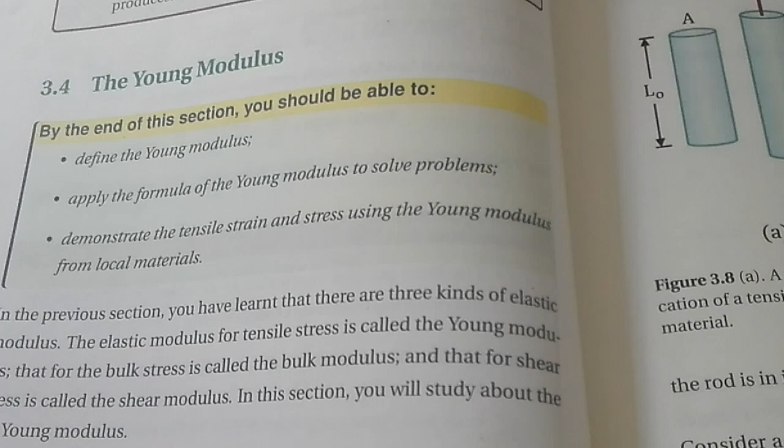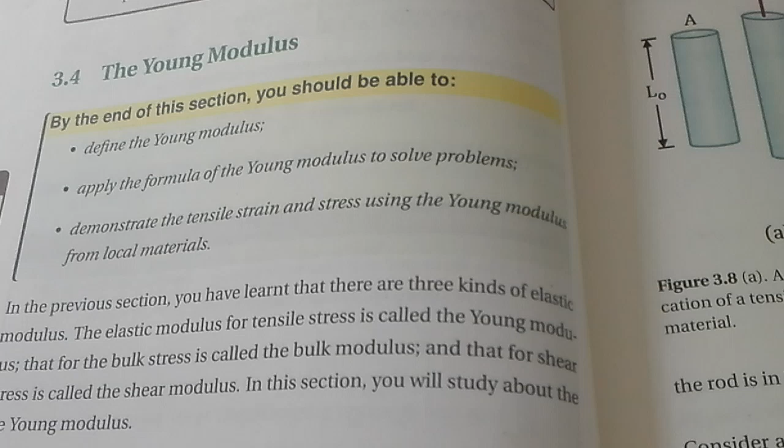the magnitude of the strain produced is the same whether the stress is tensile or compressive. The strain value of the material is the same whether the material is compressive or tensile. The ratio of tensile or compressive stress to the longitudinal strain is known as the Young modulus.

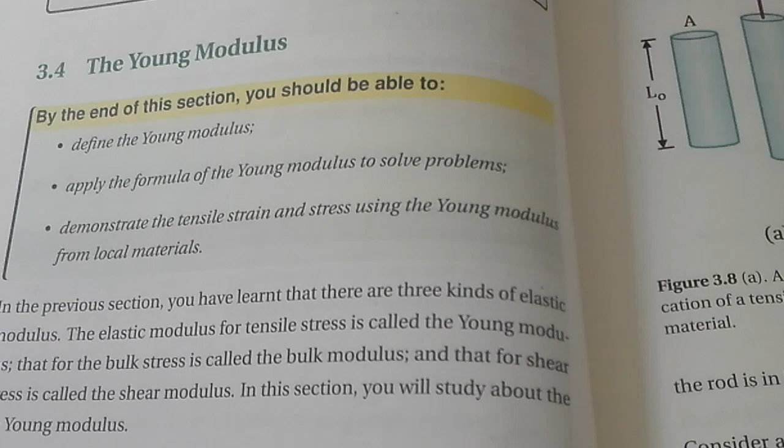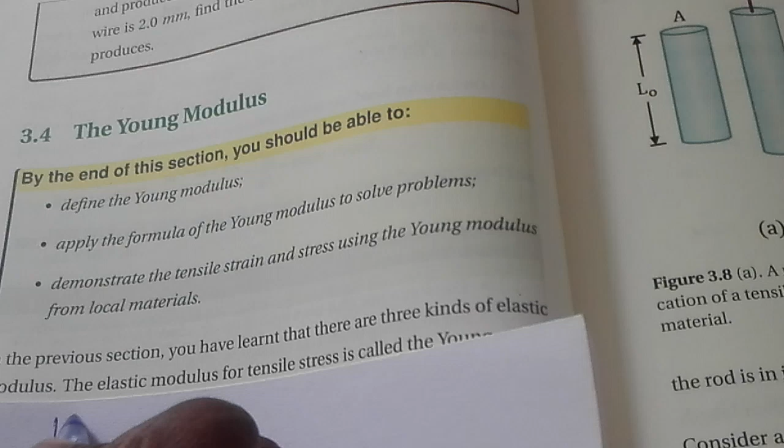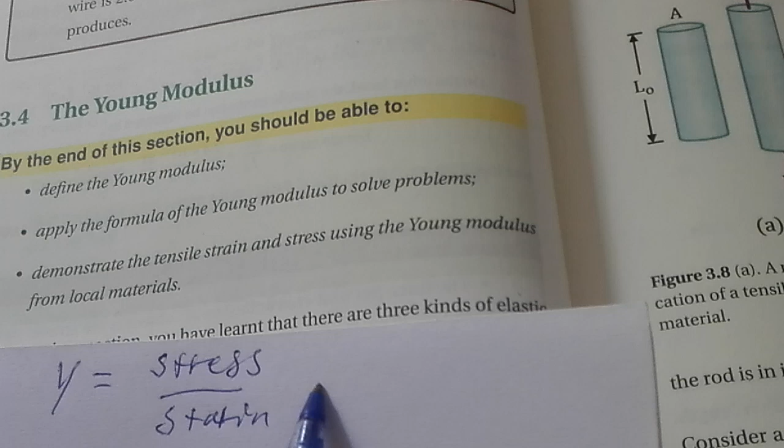Young modulus, for calculation, we represent with capital Y. Young modulus capital Y which is equal to stress over strain is how we work it out. For the same material the strain value cannot be changed, therefore within the stress, whether it is tensile or compressive, the Young modulus for the materials will be calculated like this.

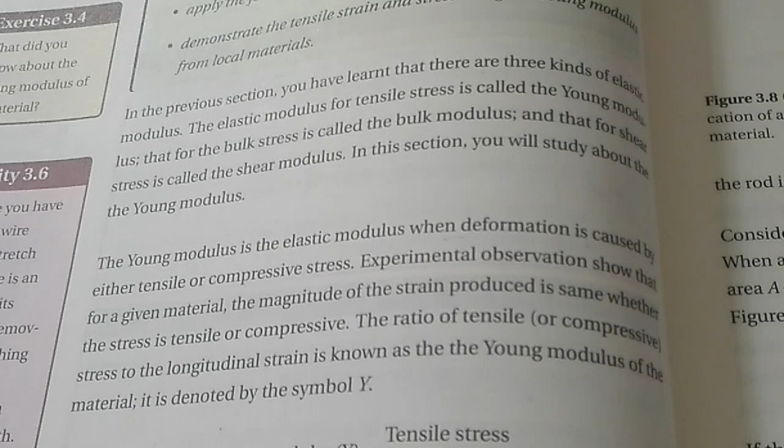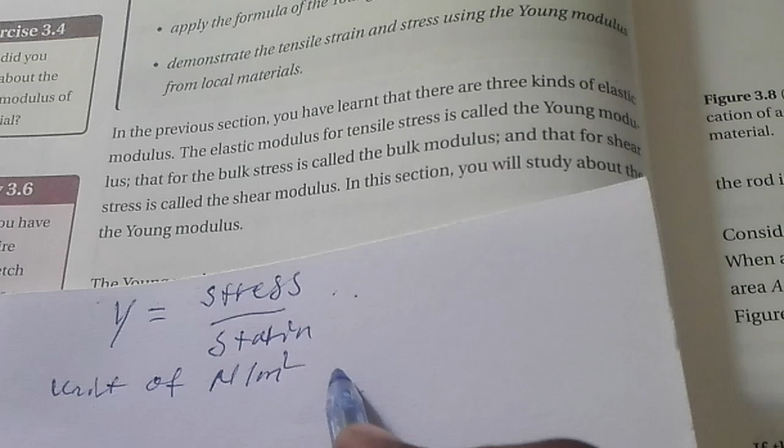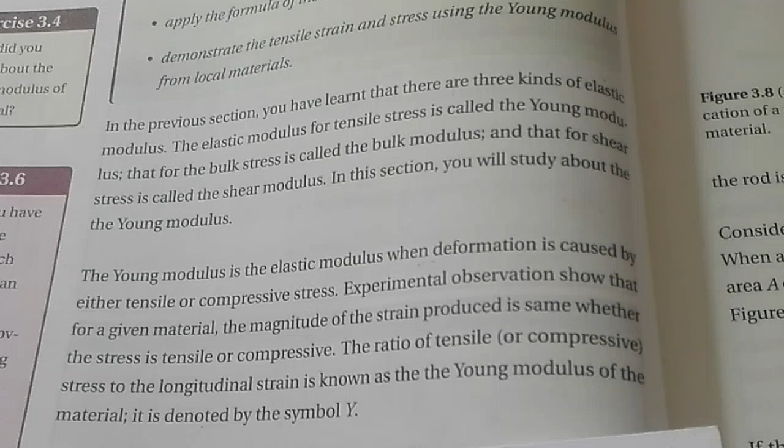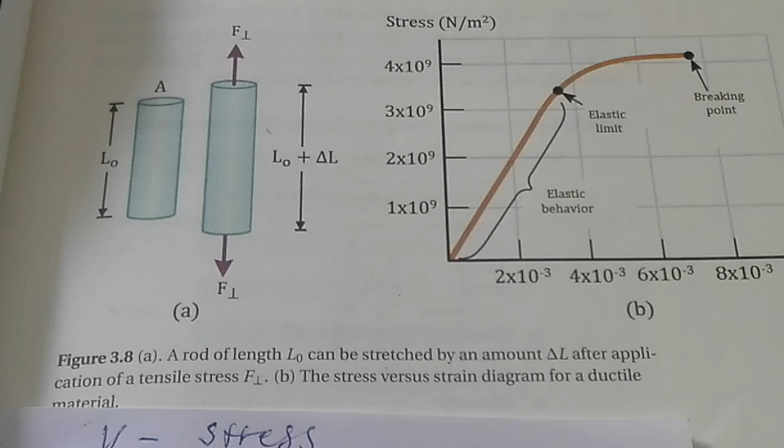or it might be pascal. That is the unit. We relate it like this. The relation between the tensile stress and tensile strain is a linear relation. As we saw before, they are directly related. Tensile stress and tensile strain will have a linear relation.

What you see here is what was shown before. For example, this material initially had a certain length, and this cylindrical material, as an external force is applied to it like a spring force, it will be stretched and have a length increase like this.

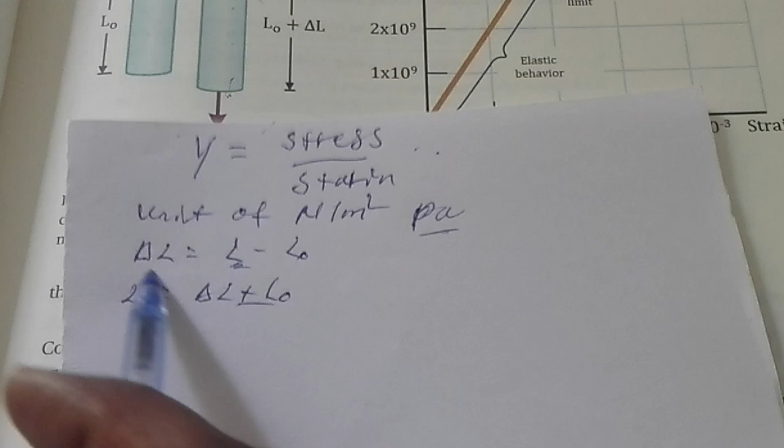Y capital which is equal to stress, meaning force over area, all over strain, meaning tensile strain, change of length over length naught. If we use reciprocal multiplication, what happens? It becomes force times length naught over area times change of length.

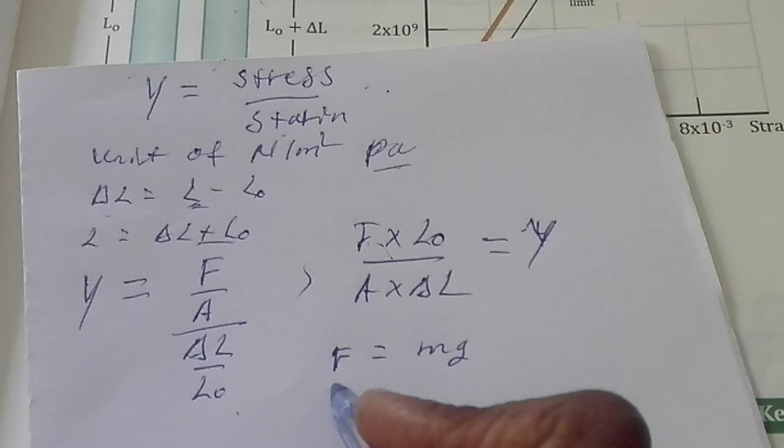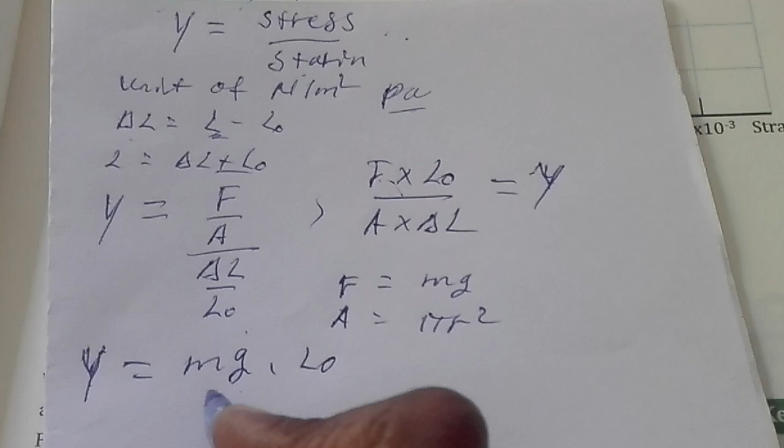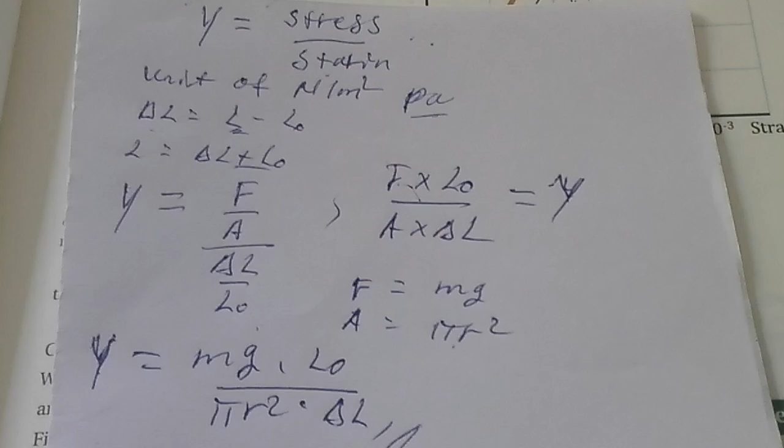Y capital which is equal to force, substitute mass times gravity, times length naught over area pi r square times change of length — this is the formula that we use to equate the Young modulus within tensile or compressive strains.

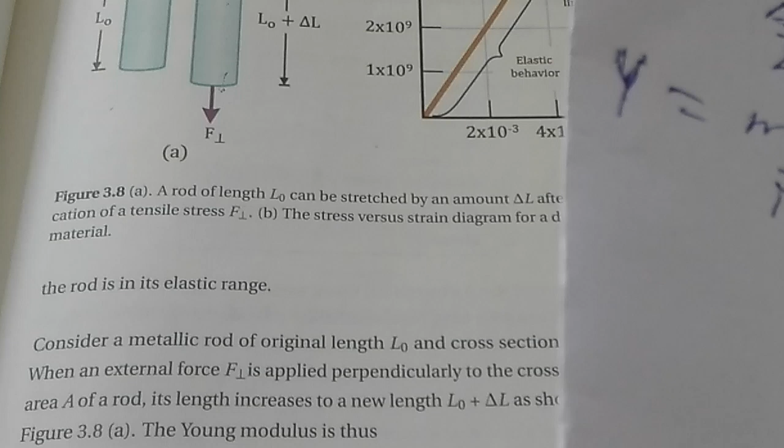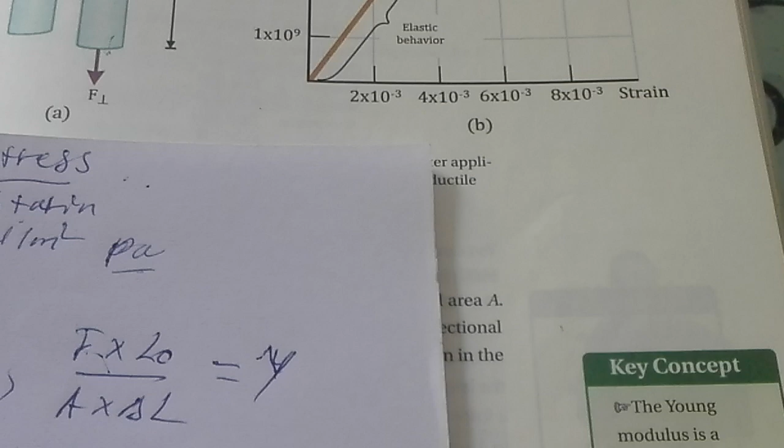We can show Young modulus for compressive stress or tensile stress this way. So what does Young modulus mean? Young modulus is the property — a property of the material that tells us how easily it can stretch and deform, and is defined as the

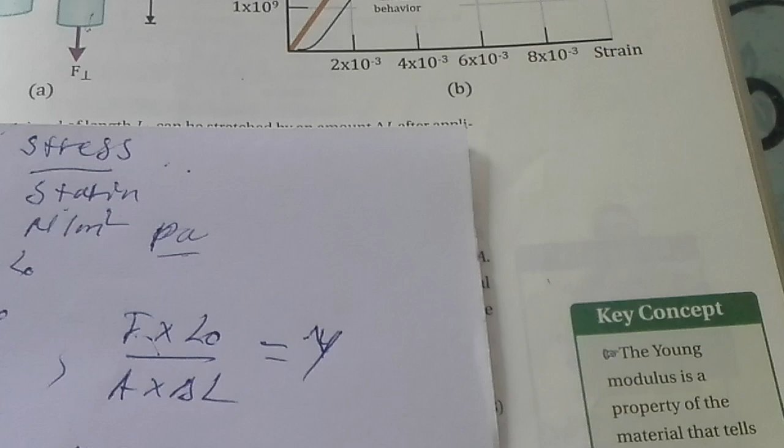ratio of tensile stress to tensile strain. So you have to make clear the definition of Young modulus like this.

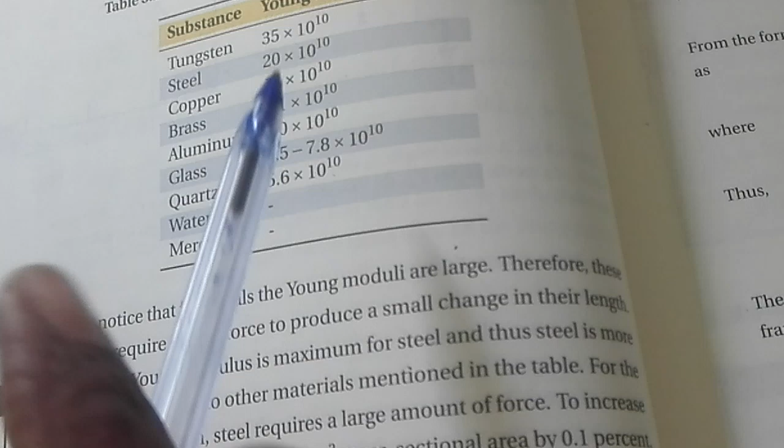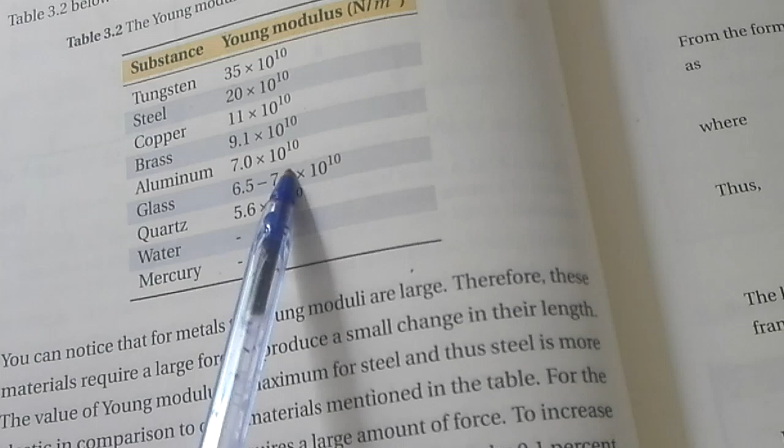እዚህ የምታዩት young modulus of different substance in Newton per meter square ነው የሚለን። ሰንጠረዡ ላይ የተቀመጡልን ሳብስታንሶች አሉ እዚህ ልዩ ቁሶች እዛ ያንግ ሞጁለስ ቫልዩዋቸው አለ። አብዛኛዎቹ ሜታሎች ናቸው።

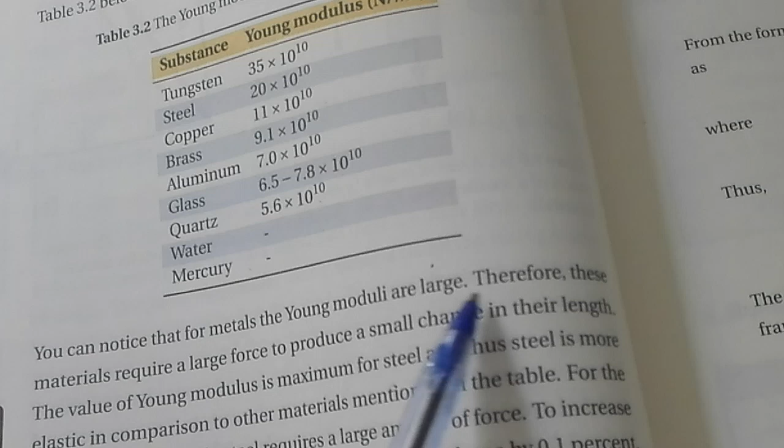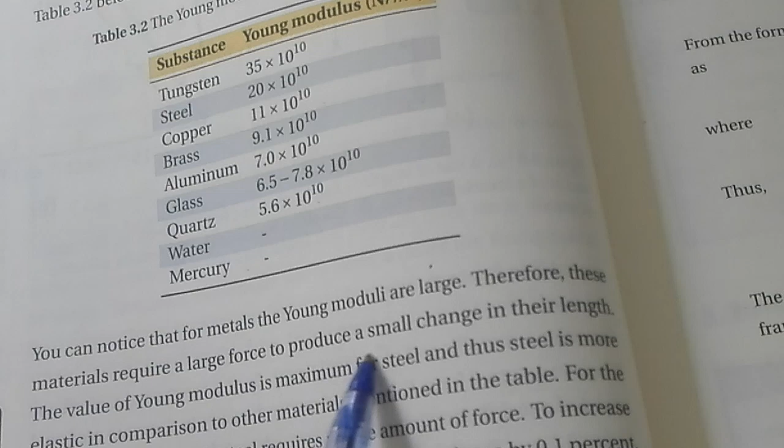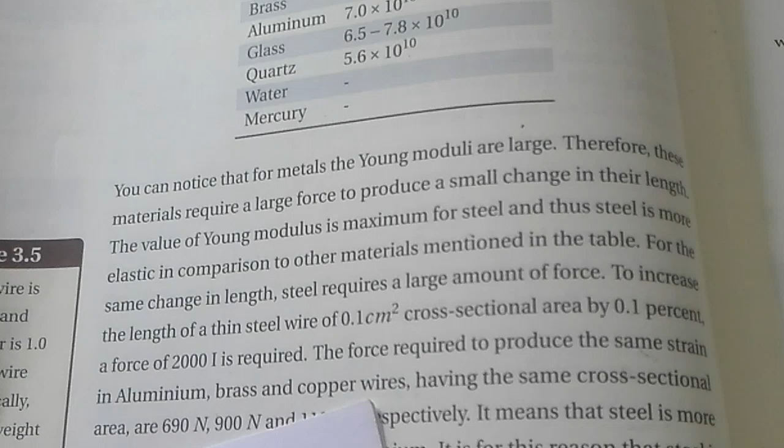ስለዚህ ሜታል ደግሞ ከፍተኛ large values of Young modulus ነው ያላቸው, therefore the material requires large force to produce a small change in their length ማለት ነው። when the Young modulus for the substance will be greater it means it requires a greater external force to deform the material ማለት ነው። ስለዚህ you have to make this clear for the substance appearing within the table.

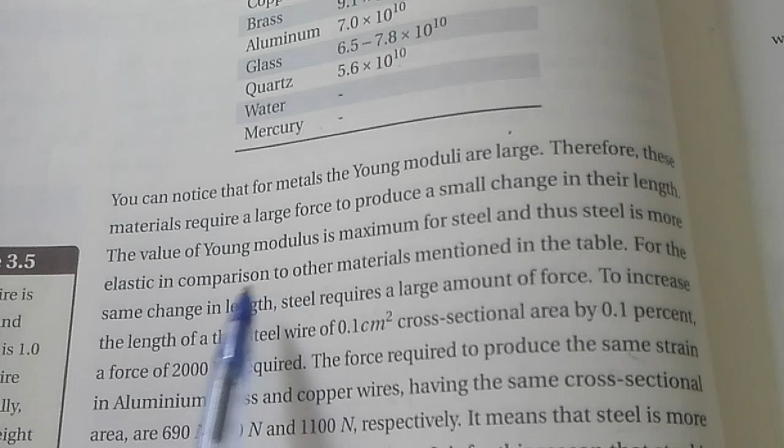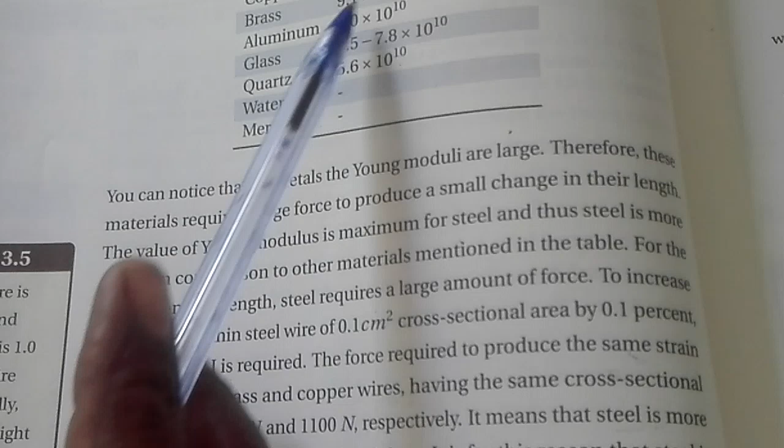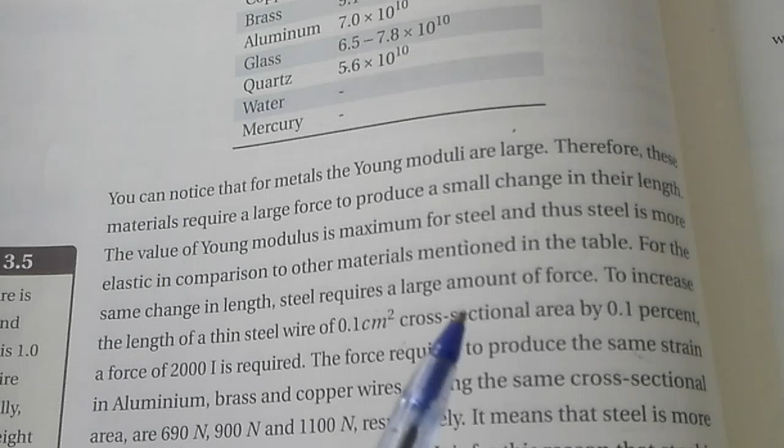ለምሳሌ ከስቲል አንስተን ስቲል ኮፐር ብራስ አሉሚኒየም እያልን ስንሄድ Young modulus ቫልዩዋቸው እየቀነሰ ነው የሚሄደው። ከፍተኛ Young modulus ቫልዩ ያለው ስቲል ነው። ስለዚህ ስቲልን ከሌሎቹ ሜታል ታይፖች ጋር ስናነጻጽረው greater large values of Young modulus value አለው።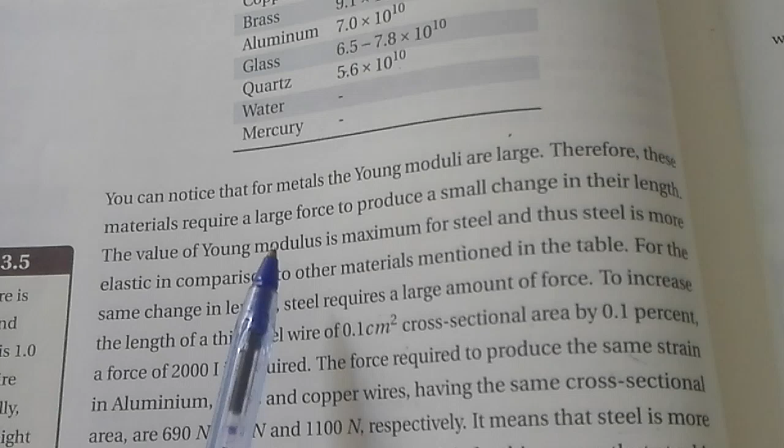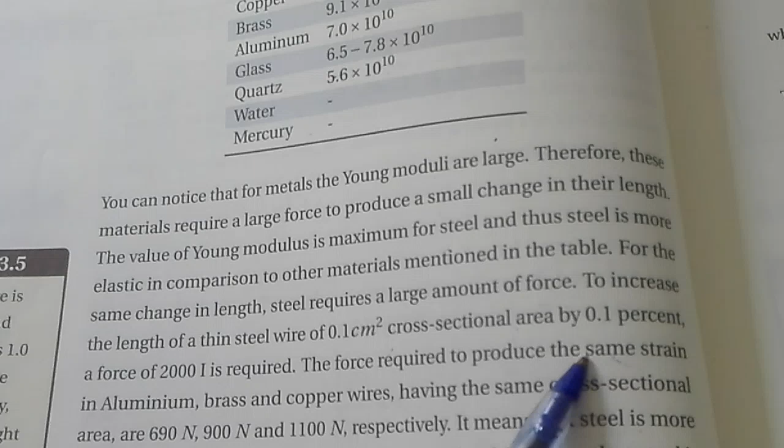ይሄ ማለት ነው it will require large external force to deform the steel ማለት ነው። ስለዚህ steel ተመራጭ ነው የተለያዩ አገልግሎቶች ላይ ለማዋል፣ በቀላሉ ዲፎርም ስለማይሆን፣ ሬዚስቲቪቲው ከፍተኛ ስለሆነ very necessary metal type ነው ማለት ነው።

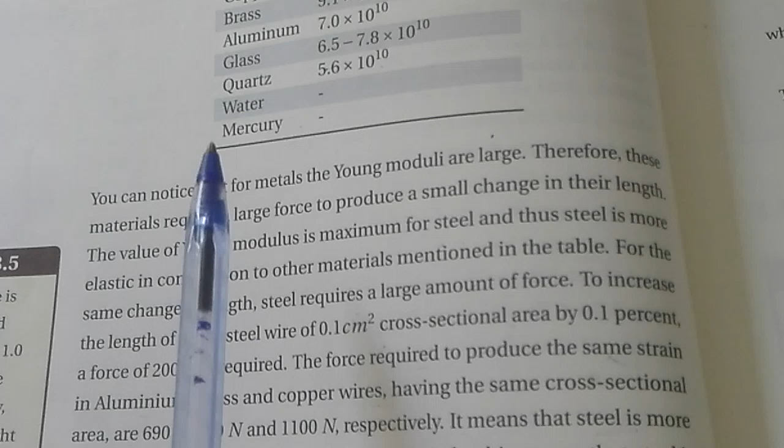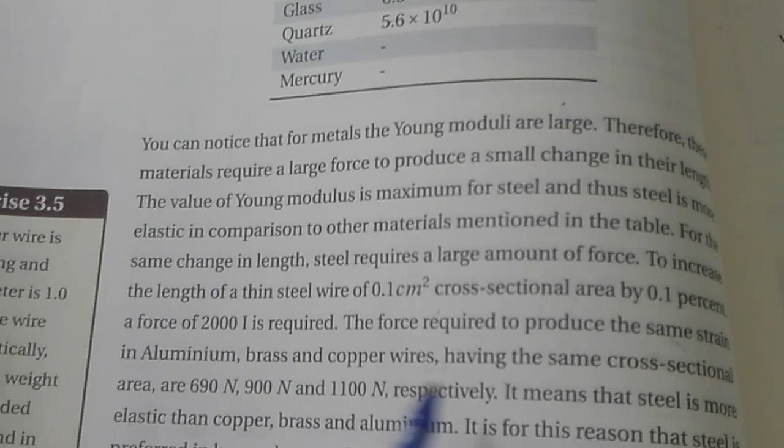depending on the Young modulus value, the force required to produce the same strain ለምሳሌ in aluminum, brass and copper wire will have the same cross sectional area። እነዚህ ሜታሎች ላይ አንድ አይነት ስትሬን፣ አንድ አይነት ክሮስ ሴክሽናል ኤሪያ ኖሯቸው የሚተገበርባቸው ፎርስ በእያንዳንዱ ይለያያል፣ ዲፎርሜሽን ለማምጣት ወይም ሼፓቸውን ለመቀየር ወይም ቼንጅ ኦፍ ሌንግዝ ለማምጣት ቴንሳይል ስትሬሳቸውን ለማምጣት።

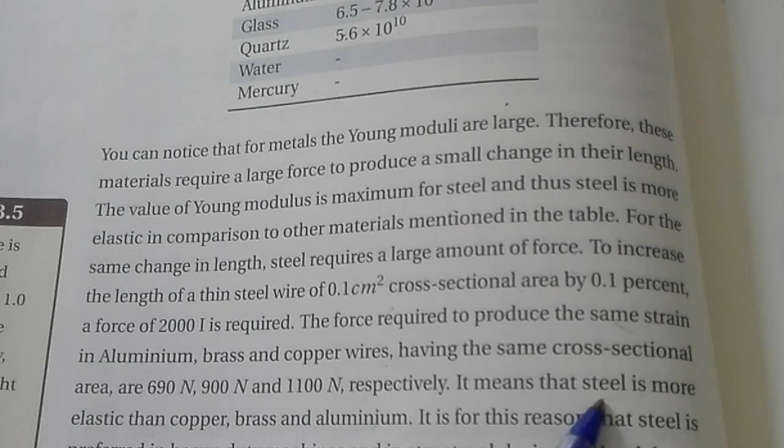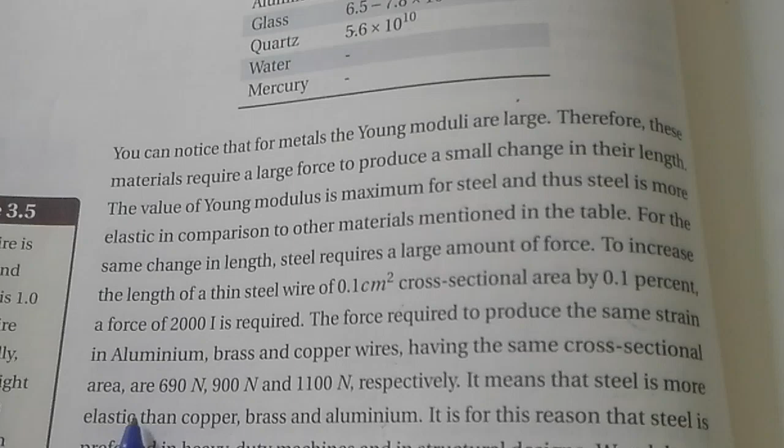force acting on the metal type will differ as we see here። it means that steel is more elastic than copper, brass and aluminum። ስለዚህ ከዚህ ከምናየው አንፃር steel is more elastic than copper, brass and aluminum። ከሌሎቹ ሜታሎች ኤላስቲክ ባህሪው የተሻለ የሚሆነው ስቲል ነው ማለት ነው።

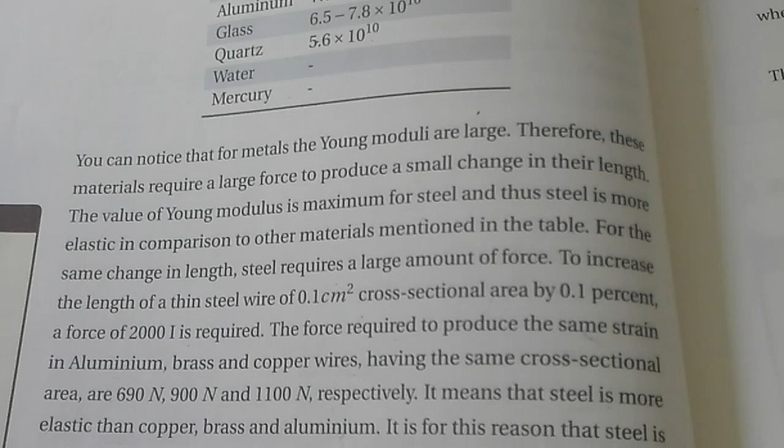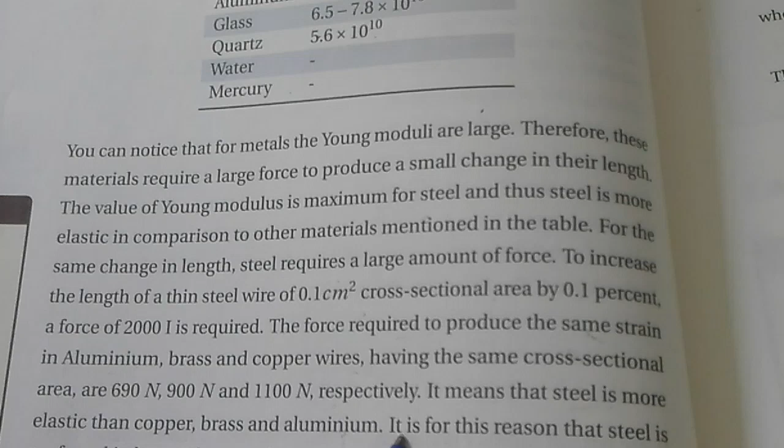it is for this reason that steel is preferred in heavy duty machines ለትልልቅ ማሽኖች አገልግሎት and in structural designs አገልግሎት የሚውል ስቲል ነው ማለት ነው፣ ምክንያቱም it is very important to make different designs using the elastic property of the material ማለት ነው።

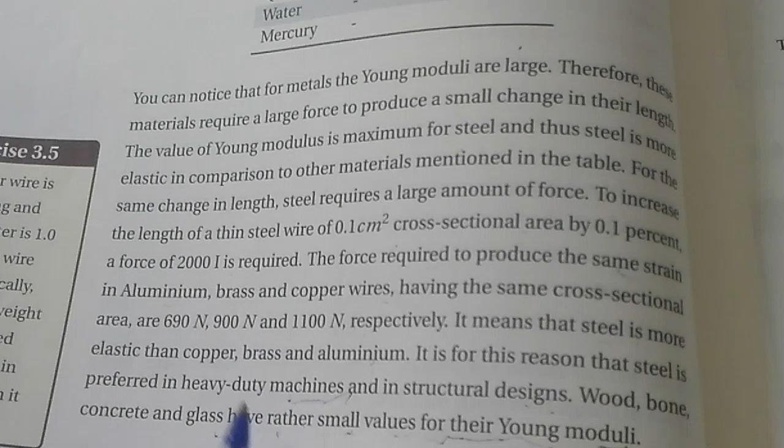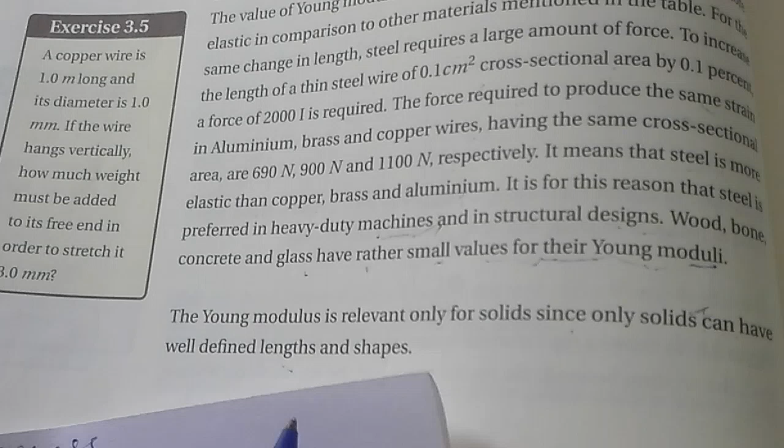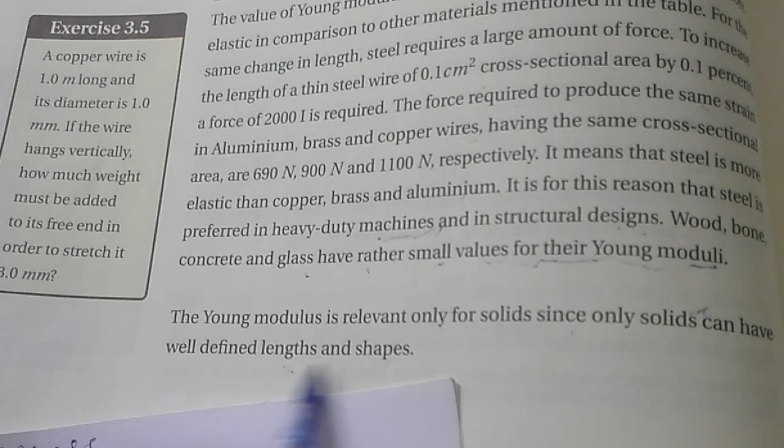በዚህ ሁኔታ በአብዛኛው the Young modulus relevant የሚሆነው matter existence አለ in three forms፤ matter will exist in solid, liquid and gas forms። ከነዚህ ከሶስቱ Young modulus relevant የሚሆነው በሶሊዶች ላይ ነው፣ በጠጣር ቁሶች ላይ ነው፣ ምክንያቱም ጠጣር ቁሶች የራሳቸው የሆነ ባህሪ ያላቸው ዲፋናይት የሆነ ሌንግዝ እና ሼፕ አላቸው ማለት ነው። depending on the definite shape and length of the solid materials, Young modulus is relevant there ማለት ነው።

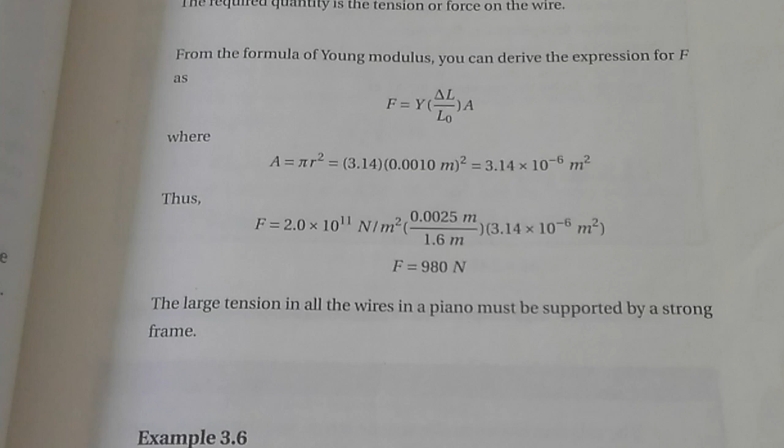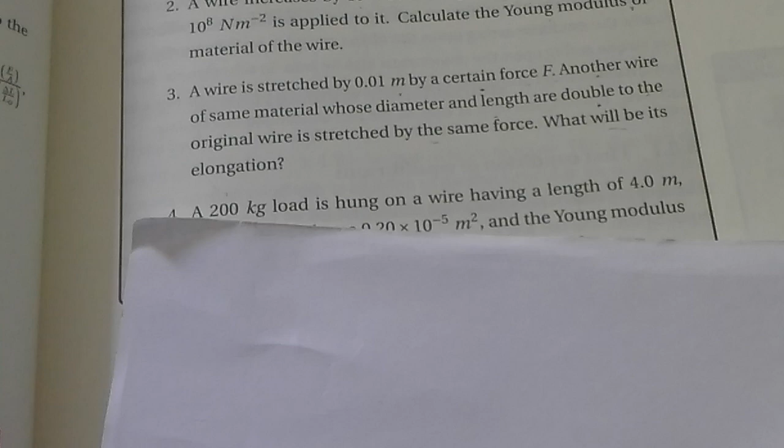ያን ነው የሚያሳየን። በዚህ መሰረት ጥያቄ እንሰራለን አብረን። ከመጻፋችሁ የተሰሩ ጥያቄዎች አሉ፤ የተሰሩትን እናንተ ኦንላይን ላይ ታያዋቸዋላችሁ፣ ያልተሰሩትን አብረን እንስራ። ለምሳሌ ሪቪው ፔጅ ላይ ሁለት ጥያቄዎችን አብረን እናያለን። እዚህ የምታዩዋቸው ጥያቄዎች አንደኛው ጥያቄ የሚለው ምንድነው እዚህ ጋር ያለው?

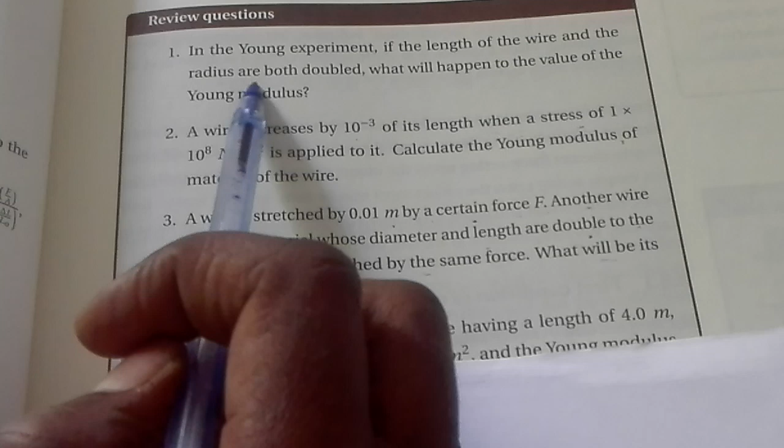in the Young's experiment, if the length of the wire and the radius are both doubled, what will happen to the values of the Young modulus? ይሄን ለመስራት ምንድነው የምናደርገው? ፎርሙላ ኦፍ Young modulus ቅድም ያስቀመጥነውን እንጠቀማለን፣ ስንሰራ ሁለቱም ዳብል ናቸው።

ሌንግዙም መጀመሪያ ጊቭናችንን እናወጣለን ቀለል ለማድረግ። given የተሰጠን ምንድነው? L naught አለ L0, L2 is equal to twice of L1 ተብለናል፣ then after radius 2 is equal to twice of radius 1 ተብለናል።

double ነው ሁለቱም ተብለናል። ስለዚህ ኢኩዌት እናድርግ፤ young modulus 1 is equal to force times length 1 over area, pi r square, r1 square ነው፣ times change of L ብለን ሰራለን። young modulus 2 is equal to force times L2፤ what's L2? 2 times L1 over pi r square፤ r2 means twice of r1, the whole square ይሆናል፣ times change of L።

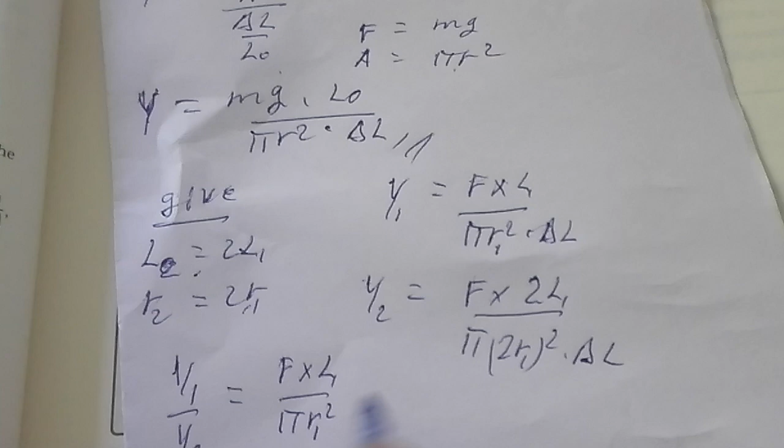so equate እናርጋቸው ሁለቱ፤ young modulus 1 over young modulus 2 is equal to force times length 1 over pi r square r1 square ይሆናል ማለት ነው።

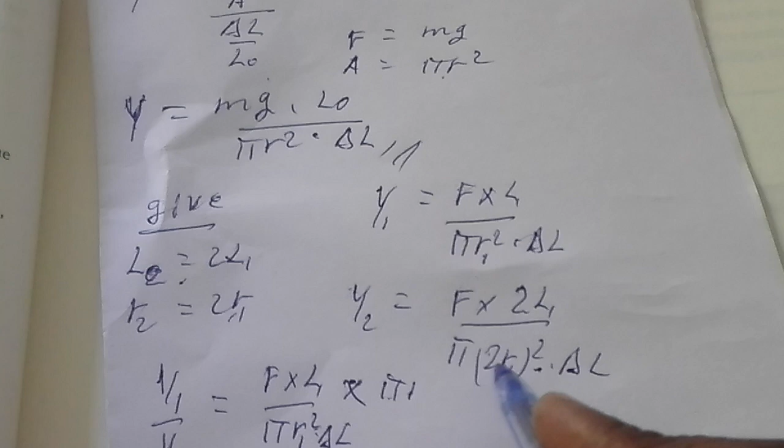cross product ተጠቅመን፤ pi r square times change of length አለ፣ pi r2 square ይሆናል 4 r1 square times change of length over force times 2 r square times 2L።

ስናጣፋ force በforce ይጣፋል፣ length በlength ይጣፋል፣ pi r square በpi r square ይጣፋል፣ change of length በchange of length ይጣፋል፣ በሁለት አንድ በሁለት ሁለት። so young modulus 1 over young modulus 2 is equal to 2, then young modulus 2 is twice of young modulus 1 over 2, ስናረገው 1 over 2 times young modulus 1, half ይሆናል። so young modulus ምን ይሆናል ማለት ነው? half ይሆናል ማለት ነው፤ it will be decreased by half እንላለን ማለት ነው።

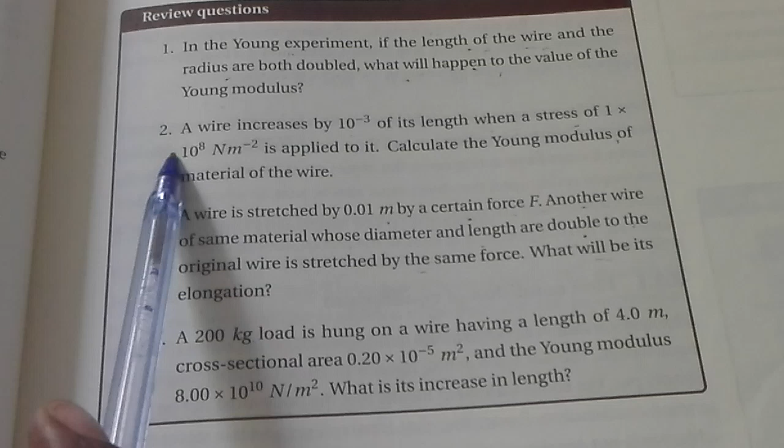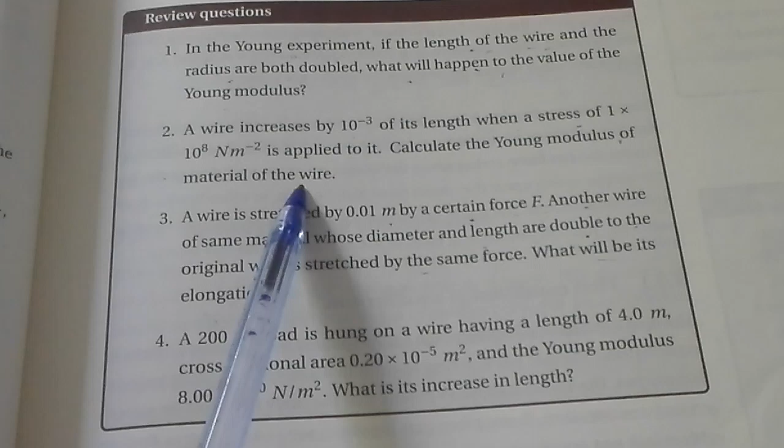እንደዚህ አድርገን ነው የምንሰራ። ሁለተኛው ጥያቄ እዚህ ጋር የሚታየው፤ a wire increased by 10 to the power of -3 of its length when a stress of 1 times 10 to the power of 8 Newton per meter square is applied to it. Calculate the Young modulus of material of the wire ይላል። apply የምናደርገው ዳይሬክት ፎርሙላውን ነው ቅድም ያሳየኋችሁን።

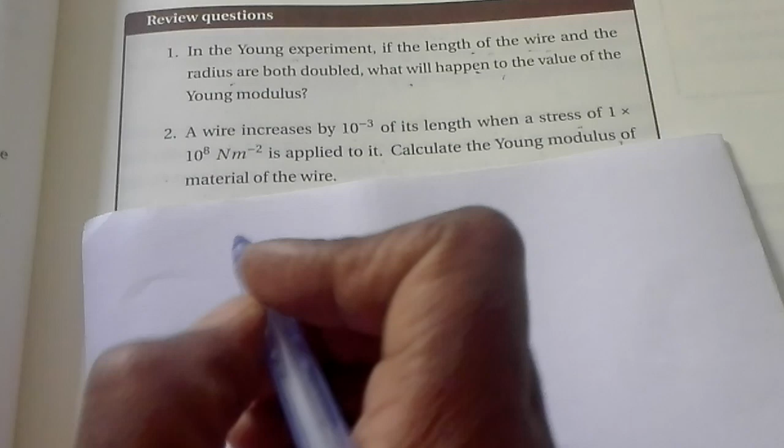ፎርሙላ ስለሰራነው እንዴት ነው የምታደርጉት? እዚህ ጋር አብረን እንስራው፤ young modulus Y capital is equal to stress over strain፣ ለ general ነው፣ for tensile stress that means stress, strain means tensile stress over tensile strain ማለት ነው።

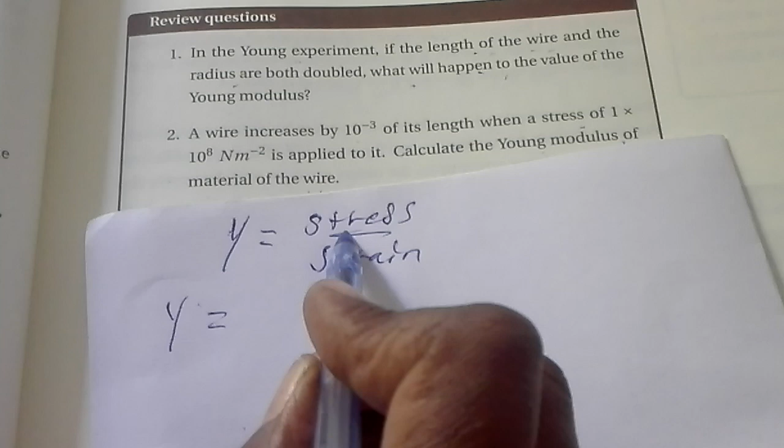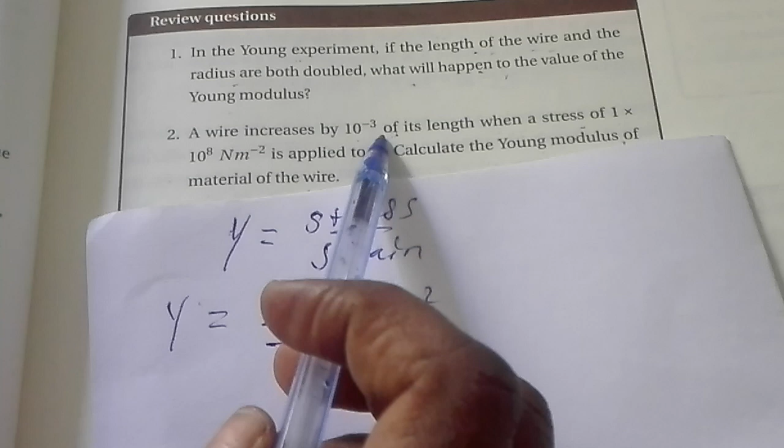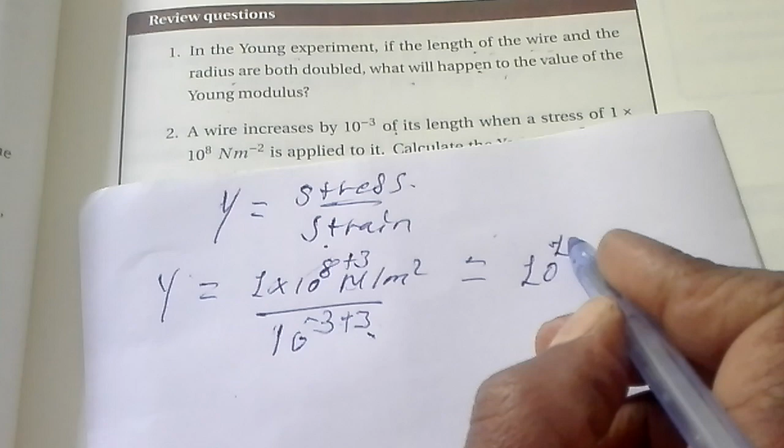so young modulus Y capital is equal to what is the tensile stress? ተሰጥቶናል 1 times 10 to the power of 8 Newton per meter square ተብሏል፣ over what is the tensile strain? it will be given within the equation 10 to the power of -3, unitless, dimensionless quantity። -3 ነበረው ወደ ላይ ሲሄድ ወይም ደግሞ +3 ብታደርጉ የ0 ይሆናል፣ +3 ፓወሩን ማለት ነው፣ -3+3=0, 10 to the power of 0 is 1. so ምን ይሆናል ማለት ነው? 8+3=11, 10 to the power of 11 Newton per meter square ይሆናል፤ this is the Young modulus, the value of Young modulus ብለን እናስቀምጣለን ማለት ነው።

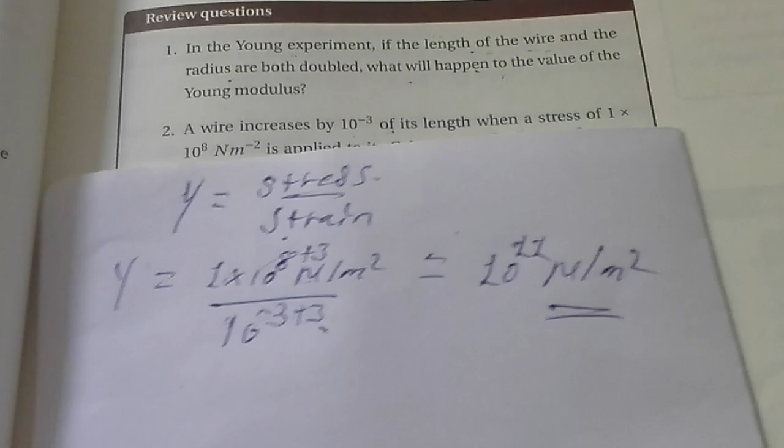እንደዚህ ነው የምንሰራው፤ ጥያቄዎችን ሌሎችን እናንተ ሞክሯቸው።